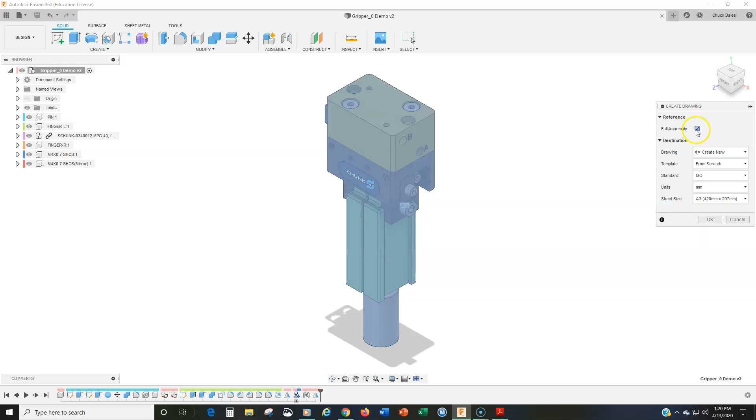So we'll go to design and drawing, and from design, we're not going to do the full assembly, so I'll click off that, and I'm going to select the components and just pick the left finger. It doesn't matter which one you pick. We're going to do an ASME standard millimeter, and we'll do a B-size drawing sheet. And we'll say OK.

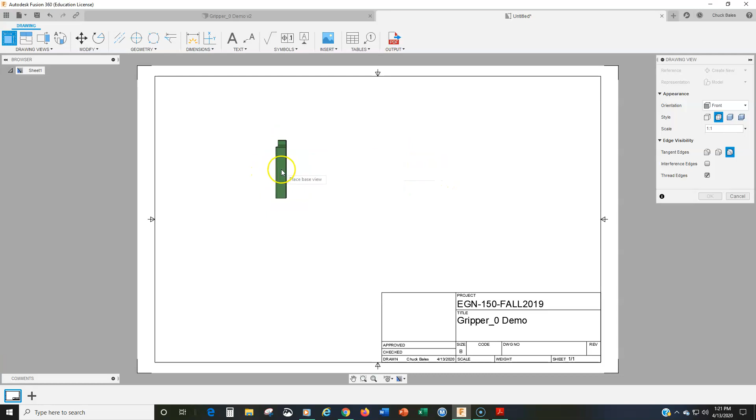All right, and here it goes. So the first thing to get this set up, you kind of need to know how you're going to orient what your base view is going to be.

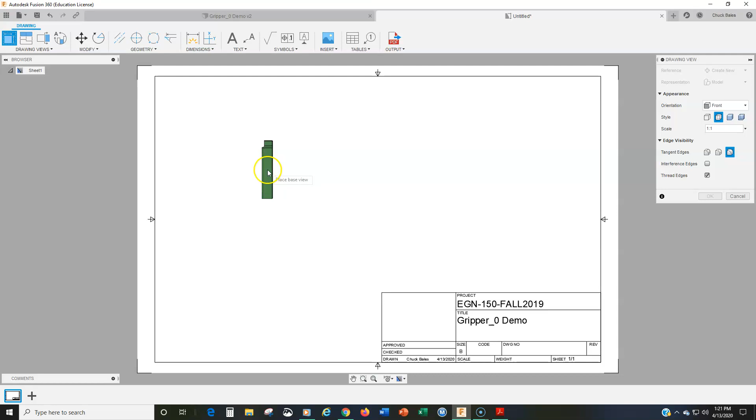And here we can kind of play around with it. Since I haven't done this yet, I'm going to be playing around a little bit too. But I don't think that's a good front view or base view. By the way, the base view does not have to be the front view, but that's kind of how my brain works. So I'm going to switch this to the left view, and we'll view like that. I think that may be better for me. Again, remember, we can kind of fix things as we go, so this isn't carved in stone.

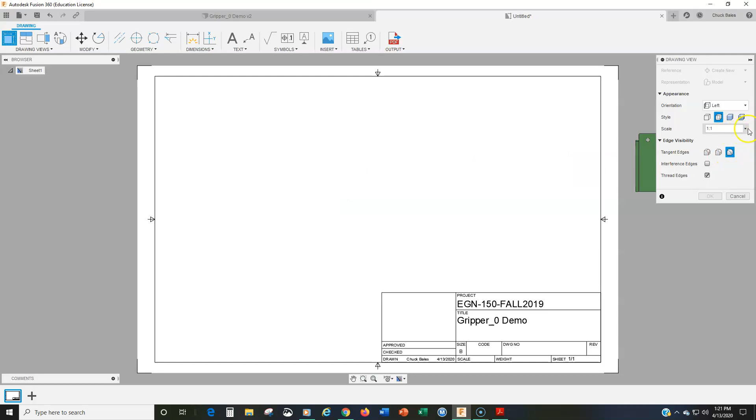And I think that's good. Let's see what happens if we go to a scale of 2 to 1 too, because that looks a little bit small. I wonder if we can get our dimensions in there. I bet we can. So I'm going to go with this one for my base view. I'll say OK.

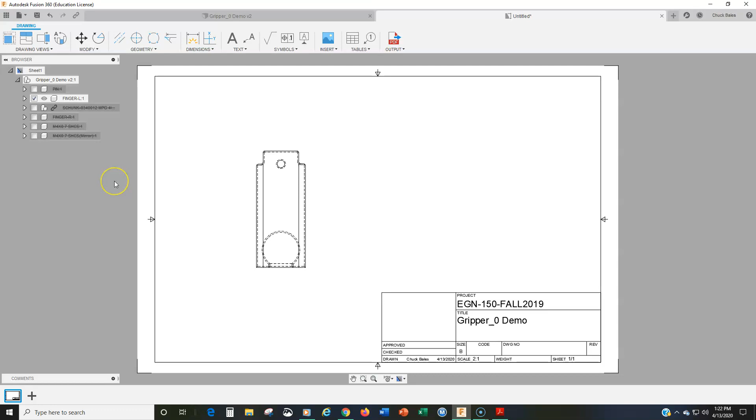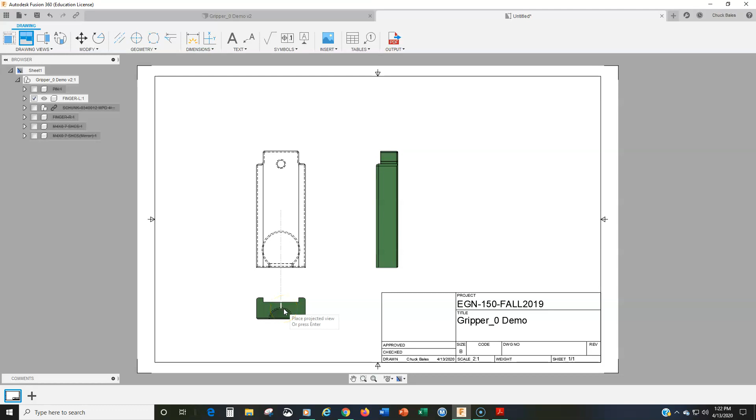Groovy. And now I'm going to do my projected views, and I want a right view. I also need a top view. Or actually, you know what, I think a bottom view may be more useful. And I think I also want to do an inside view like that. Yeah, so this one.

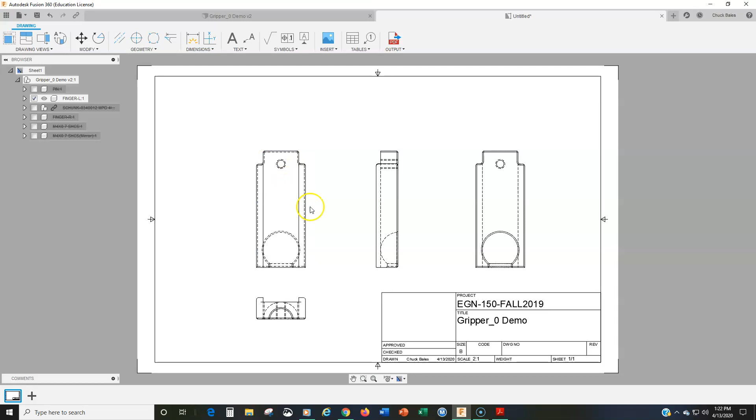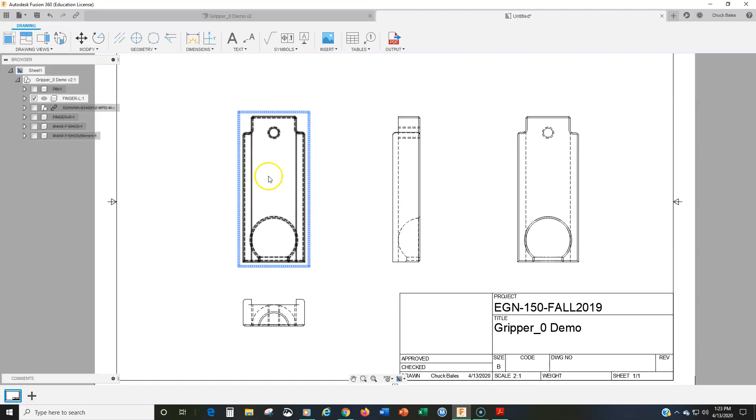All right, so now let's take a peek at these. First thing I'm going to say is some of these hidden lines are confusing, but I think we can work through that. We can always decide to leave off the hidden lines, but the general rule of thumb is if you leave off the hidden lines, they need to be removed from an entire view. So I'm thinking these hidden lines are not very useful. But I think I'm going to just leave them in there anyway, because taking them out would not exactly be helpful either.

So let me go ahead and get some of the center marks in there. This is a good thing to bring in right there. That one didn't come in big. We'll do that right there.

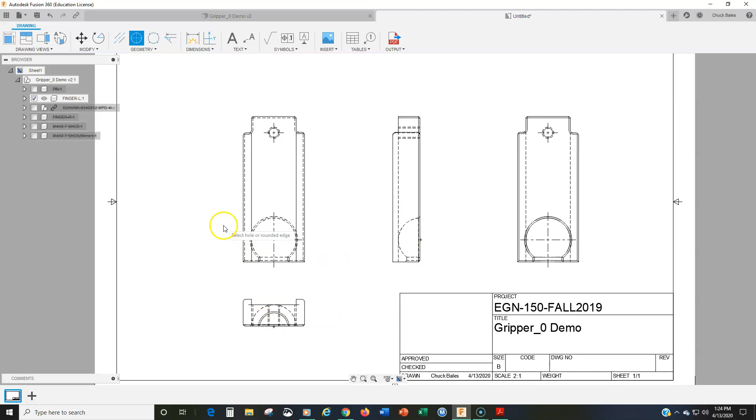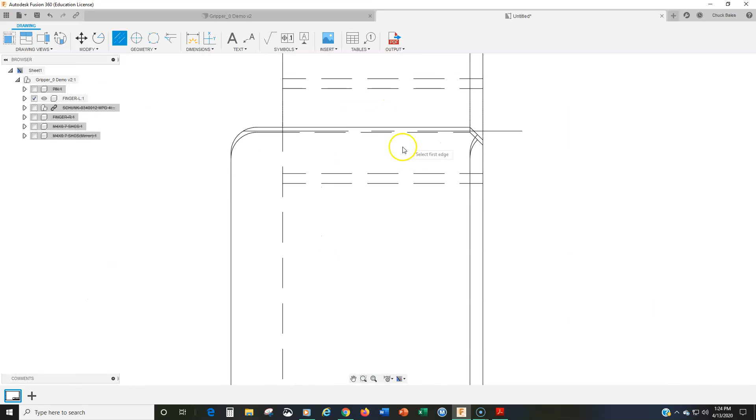And then again, that didn't come in very big. So now let's do the center line. We'll go from here to here. That looks good. We'll go from here to here. And that's kind of right on that edge right there, but it's just going to have to be—actually I'm going to lengthen it a little here to make a clear distinction for what that is.

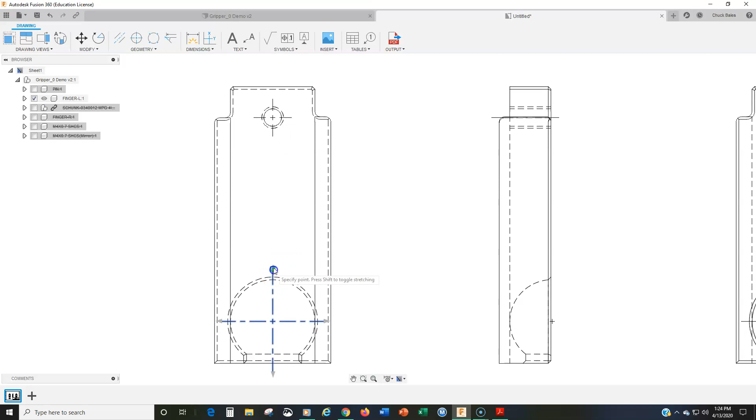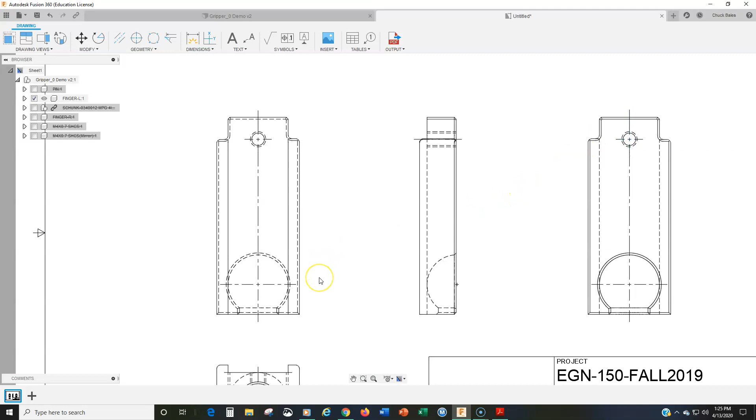And then that's good. Now one last thing, because I'm going to take advantage of the symmetry of this, the natural symmetry, I'm going to take this one and expand it right to there. That's going to possibly help me with some of the dimensioning. So we'll do that there. And that basically says, hey, this feature, this thing that I'm designing, is symmetrical, and I can take advantage of that in the dimensioning part.

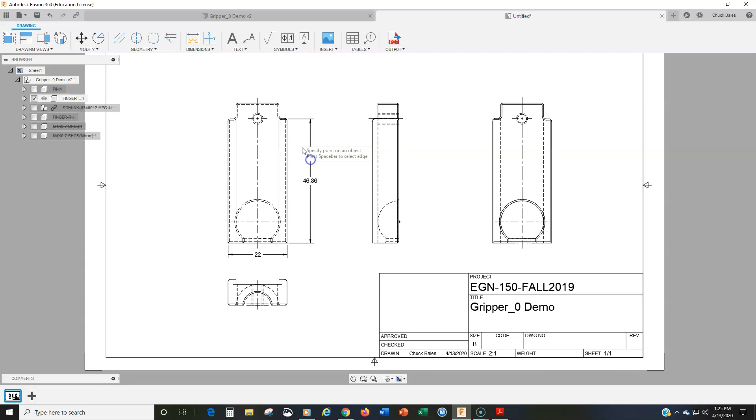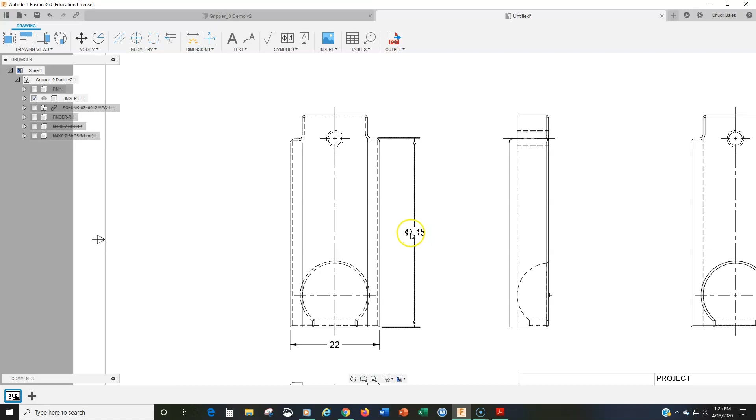So let's get the basic shape down first. We'll get the overall width right there. We'll get the overall height. And let me make sure I get the right edges. With all these chamfers, it's—yeah, see, look at that, I got the wrong edge right there. I don't want to get that. This is a good little thing. So 47.15, that's kind of an odd distance. I might go back and change that if I was doing this again.

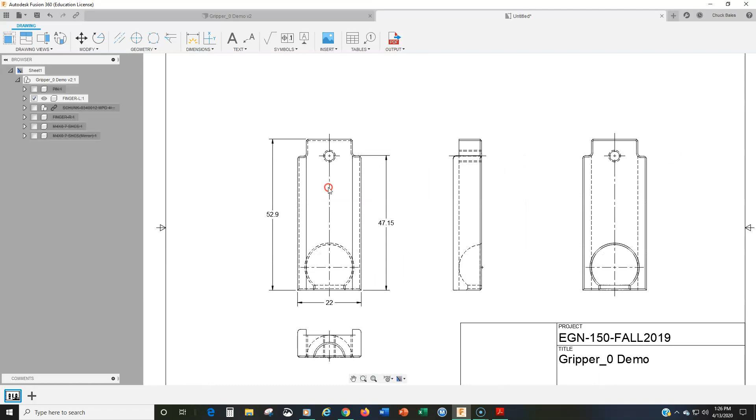The total distance here, get the total height from here to here. There we go, 52.9, again a little odd. The width across here. So I'm kind of working in stages. I'm getting the overall size first.

Right, I think that pretty much covers that overall size. Everything else, because of symmetry, I don't need to go 11 from here to here, or 11 from here to here. Symmetry says if the dimension spans across it, the distance from here to here is exactly half of the 22. That's where symmetry really helps.

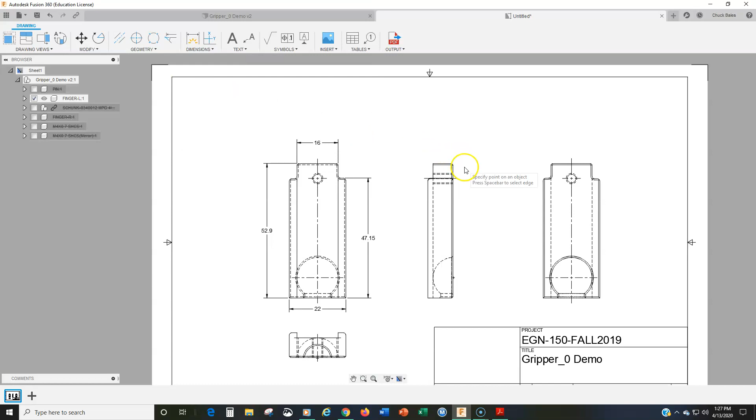I think that pretty much covers that. Now I do need a thickness dimension, and I don't like this view for that. I like this one a little better, I think it's a little more explanatory. So we'll put this down here, and then we'll go up here with this one.

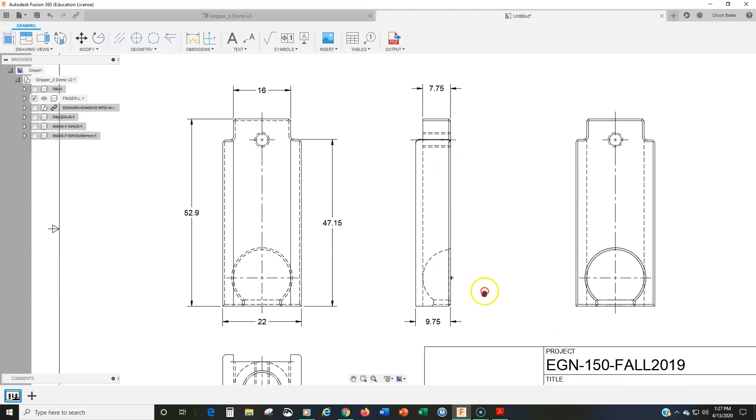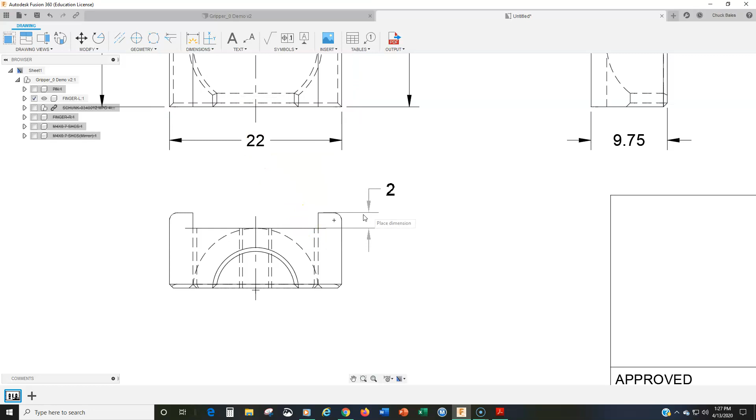And that's it for the overall shape. Now let's get the flaps, right? So what I want to specify is how much these extend. I'm going to dimension from here to here, and those are 2 millimeter extensions. Go right there. Yeah, I shouldn't have grabbed that edge, I should have grabbed it right there.

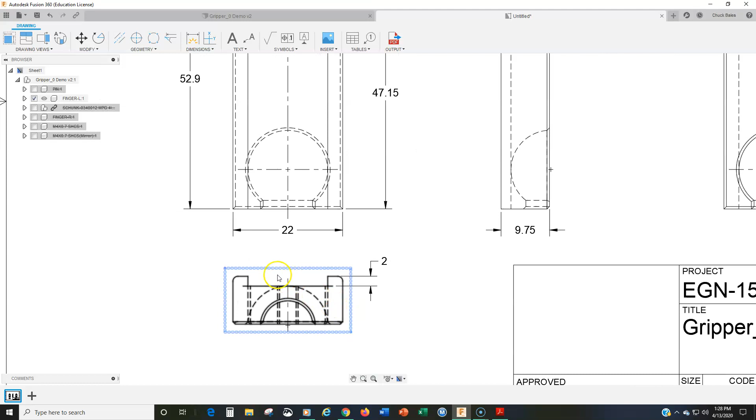And then the inset right there, I want to do that also, and so that's going to be from there to there, 16 again.

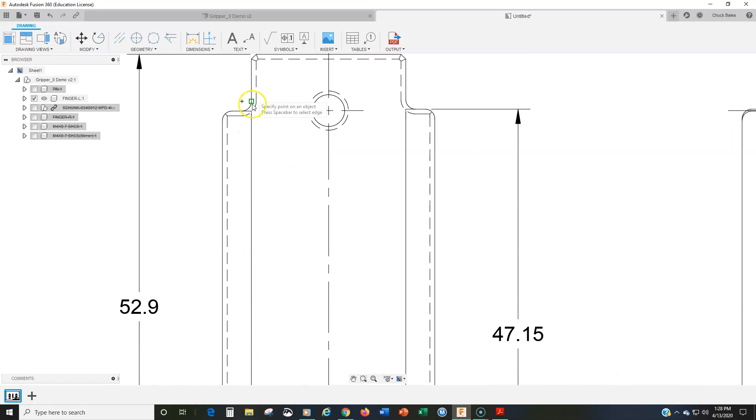Now that's really that right there, but that's a redundant dimension, so I'm going to take that out because we don't need that. Or in fact, maybe I can do this—here's a little thing, we can make this a reference dimension. A reference dimension doesn't get added to as a redundant dimension. So we can go right there. All right, and that's it.

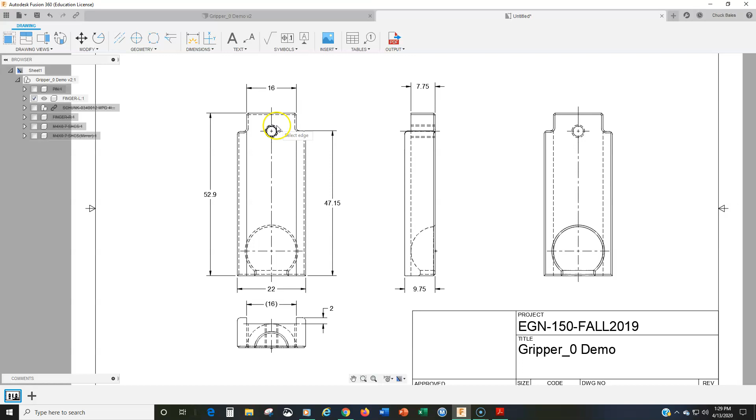Now we want to dimension the hole. That's a diameter dimension. And it's not a diameter 4 — don't forget, this is actually a...

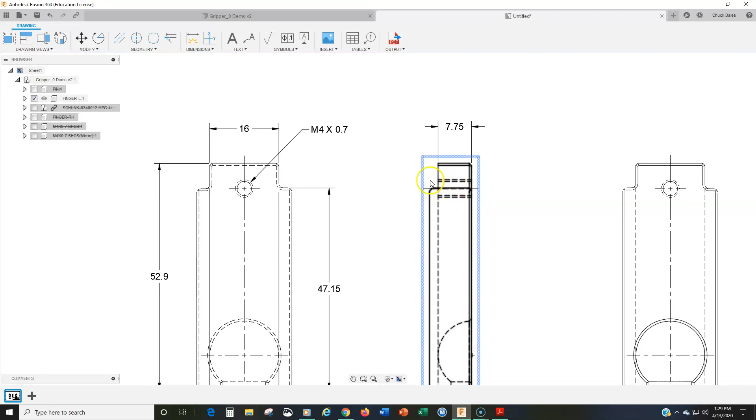M4 by 0.7 fastener, so that has to be dimensioned appropriately. It's clearly going all the way through. All right, so now the only other thing left to do is to deal with this cutout right here.

And since I'm going to have a note for the chamfer, I'm not going to dimension both of these, I'm just going to dimension the main spherical shape right there. This is not something we covered in class because it's kind of a unique thing, you don't run across it that much. So this is going to be made from a spherical radius or diameter. Since this is not a complete sphere, I'm going to use spherical radius, okay?

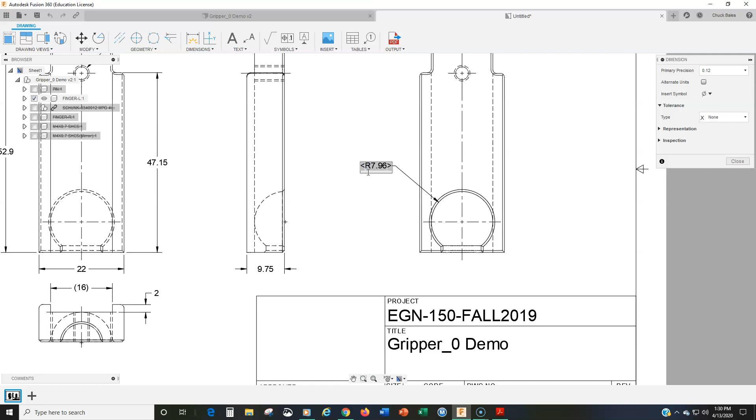And I'm going to dimension the inside, and we'll pull it out right there. And we're going to make the note, we're going to add an S in front of that. That's going to make it, you'll see, a spherical radius — that's the symbol for spherical radius, right? And we're getting that in there. The extra line here is derived from the chamfer, okay.

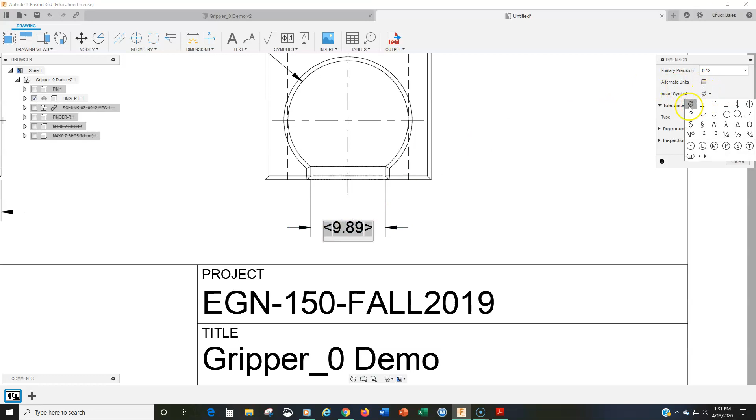This we're going to dimension as a diameter, but we need a linear dimension, and we're going to put a diameter symbol. So I'm going to go from here to here, and then we'll put that in there and do a symbol. There we go. Okay, so 9.89.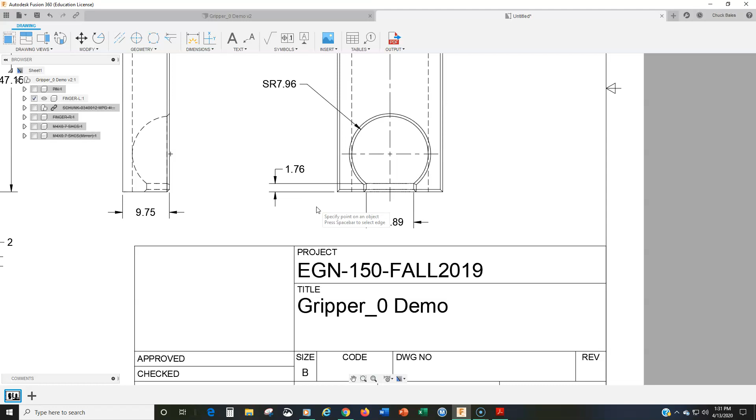And then we need to give a thickness from here to here. Okay, and then we go right there. Okay, so those are kind of the size dimensions. All right, that's pretty much all we need.

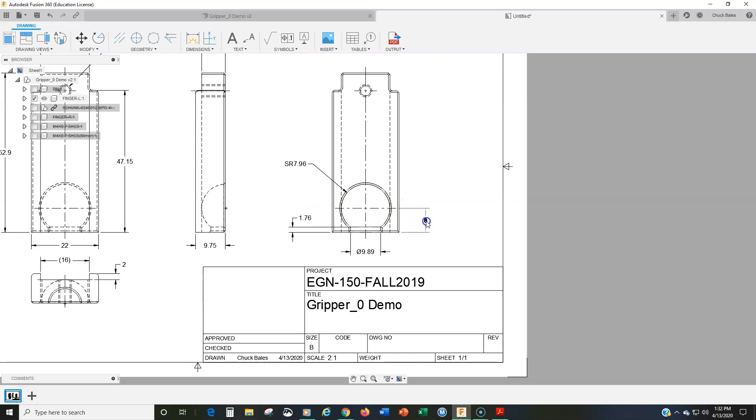Now we need some location dimensions. We need to locate where this is. So let's go to a linear dimension, and I'll pull it off of here, and that's 8. Okay, and then we need to locate this one. This might be the same as that, but yeah, it's a little bit different. Okay, so that's good. And now I'm going to spread these out a little bit.

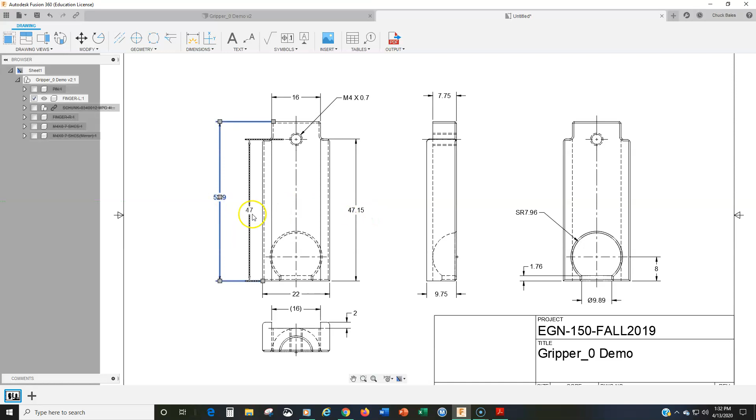Everything looks pretty good spacing wise, so we have location. Notice that these lines of symmetry really help with cutting down the dimensions — we don't have to locate a lot of features because they're on the center line. I think that's it.

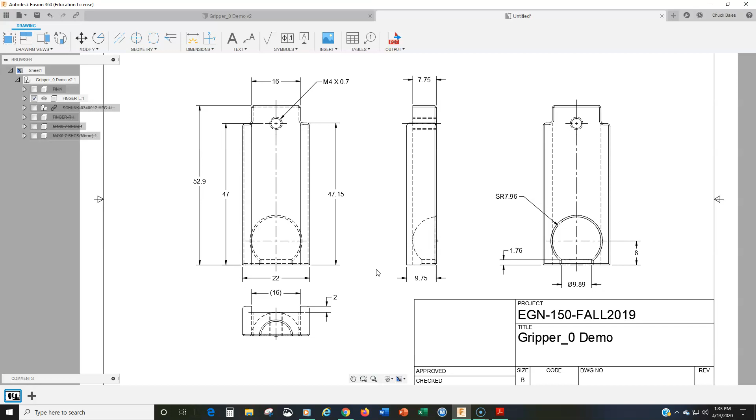Now we do need to add the notes here. So I'm going to go to text, and we'll put it right in here. I might need to move some things, but we'll go here. And let's just do that. So this is, in your standard notes, unless otherwise specified, all dimensions in millimeters.

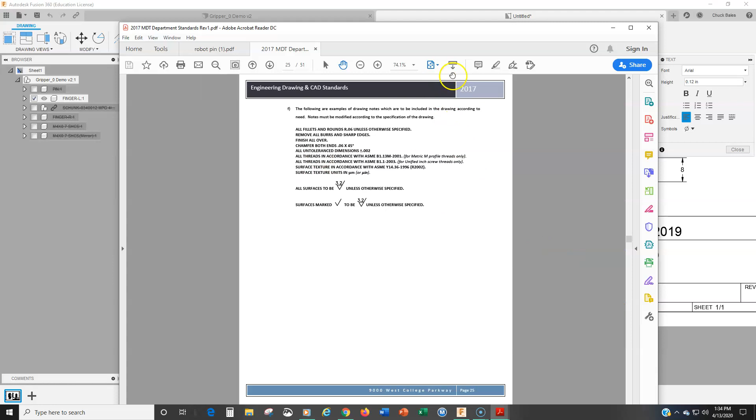And now I'm going to pull up the notes that I have — these are in your module, I'll show you, this is the standard. I already gave you these notes, so you can use a couple of those. There's one on the last drawing in accordance with ASME.

Okay, so we'll go — actually this is going to be 1, 2, drawing in accordance with ASME Y14.5-2009. I'm going to run out of room here. All fillets and rounds R1 — maybe we made those all R1. And for all chamfers, 0.5 by 45 degrees.

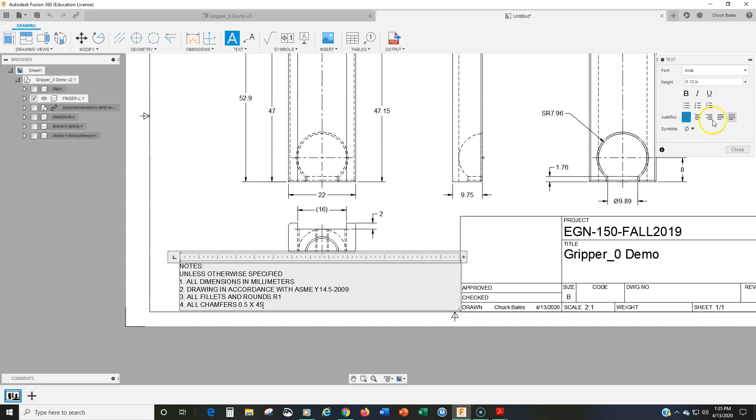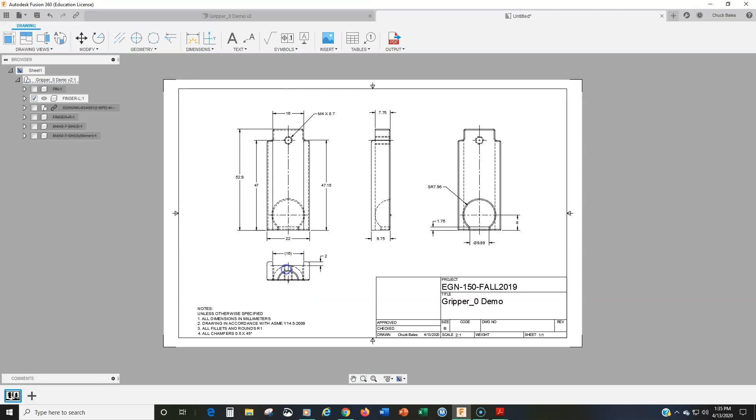And oh, we got one more that we got to put in there. So I think I'm going to have to move these a little bit. Let's move this up a little bit right there, and we'll move this up a little bit right there. There we go, that gives me a little more room. And we'll move this up like so. And then we can go 5.

What am I missing? All threads in accordance with ASME B1.13M-2001. That's for metric threads.

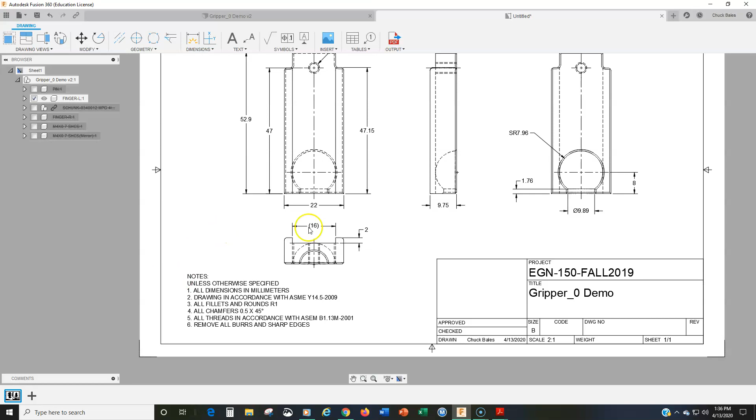So there's nothing else really that I need to do. We're not doing anything with tolerances, there's no surface texture. I suppose if I wanted to be real complete, I could say remove all burrs and sharp edges — that's kind of overkill. There we go, all right, so that's it, that's done. Very straightforward, all right, let's save that.

And next we will tackle the assembly drawing.